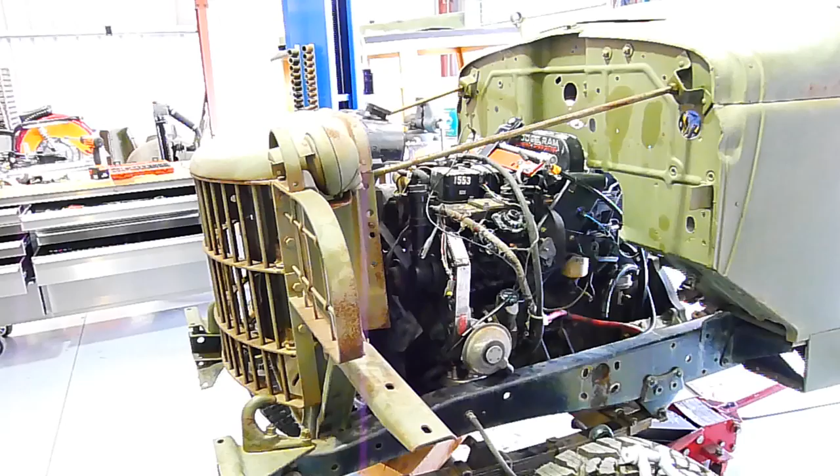So there it is, mocked up with the radiator and the front grille, everything in place. There's plenty of room, it appears, at least so far. And you can see there's even clearance for the Cummins fan in front of the radiator.

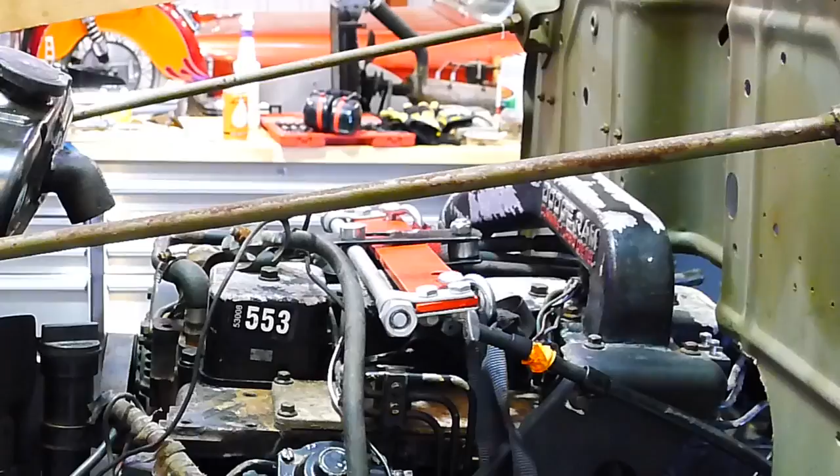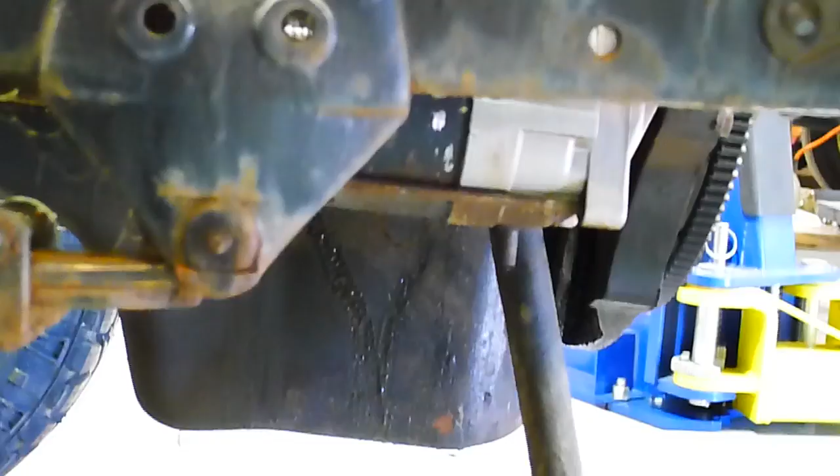I put a board up there to show where the top of the cowl is, and you can see there's plenty of room between the bottom of the hood and the top of the engine. And so there's plenty of room, so moving up 3 inches would be just fine, and it would also give me some needed clearance where the oil pan hangs down.

So if I go much further than 3 inches, then the fan starts to hit the top of the radiator. So it's going to go forward 3 inches and up 3 inches, and I've marked that on the actual frame.

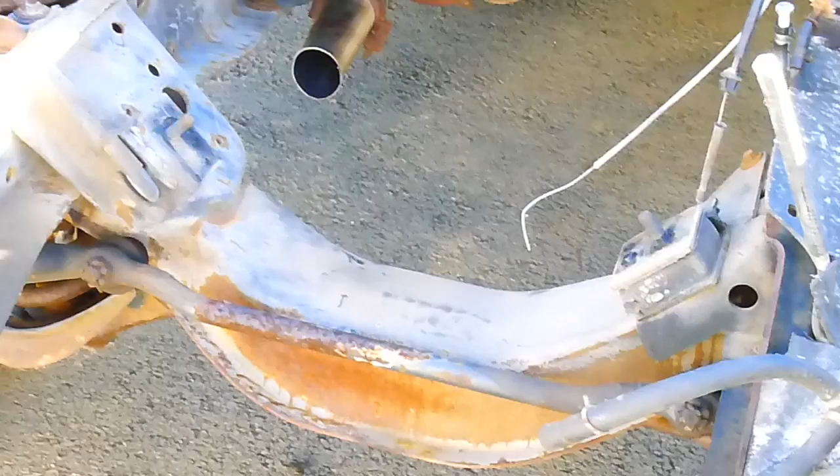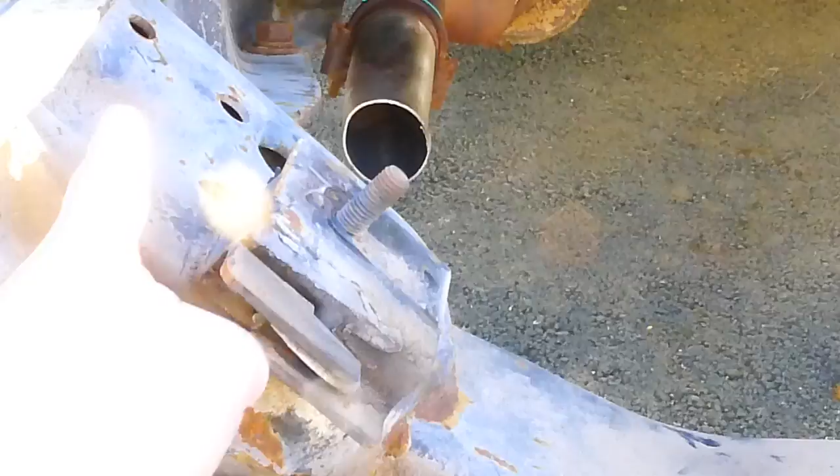So this is what the original crossmember looked like in the donor vehicle, and the important things here to me are going to be, one, this angle here, which is 45 degrees, and the distance between the two motor mounts. That's going to be critical. So I'm going to measure that up.

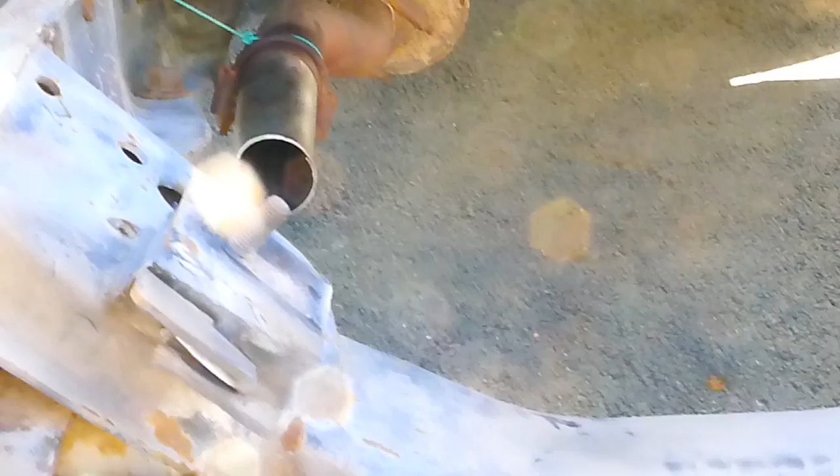I'm going to make a really rough control drawing, and then I'm going to transfer it to an accurate drawing, and I'm going to have that cross piece fabricated by a company called Paso Robles Welding, which can cut it out very accurately and weld it well. So that cross member is going to be an important piece.

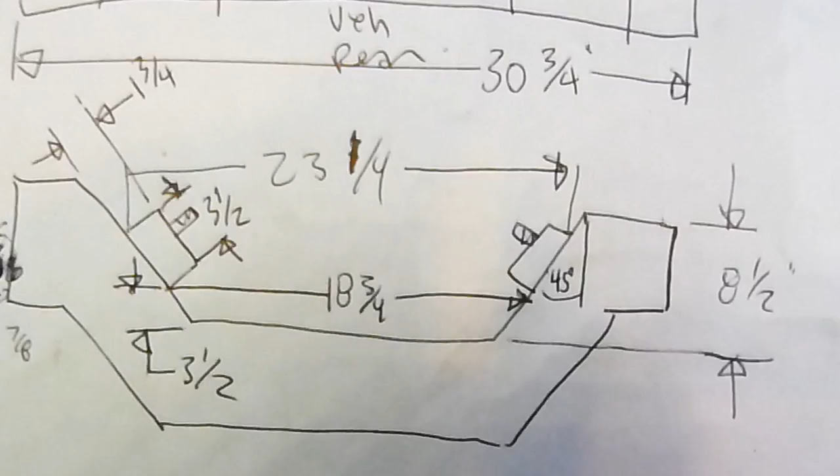So this is my hybrid drawing. Just rough dimensions, really not even accurate from a scale standpoint, but it's got all the measurements on it. You can see there's some asymmetry to the frame itself, and it's noted there, and it's all dimensioned.

And then I took it over, and this is an accurate scale drawing. I chose 1/4 inch equals 1 inch, and that's going to be the cross member. We're going to get that fabricated.

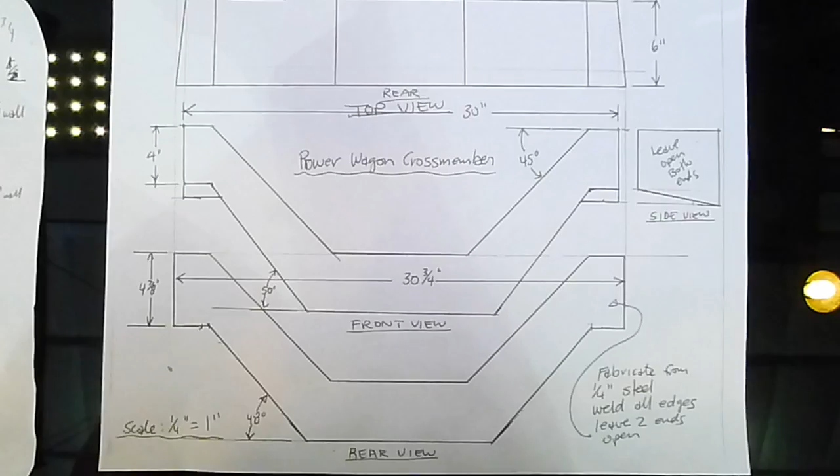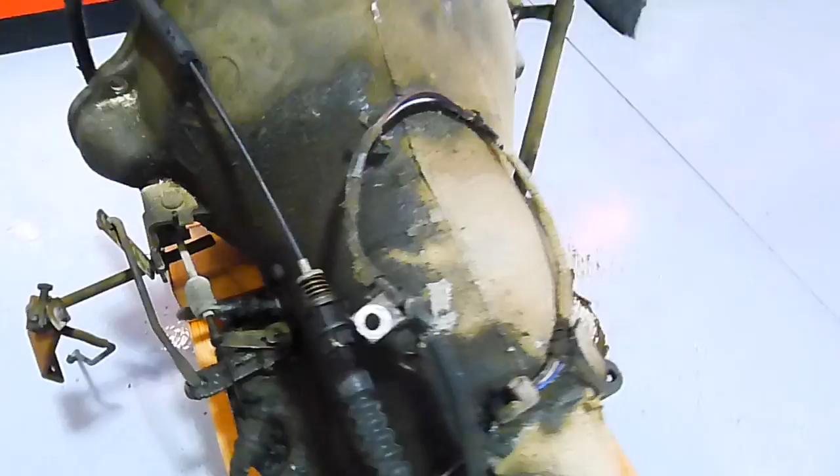The other thing I'm going to do is have this transmission rebuilt. It was working in the donor vehicle, but you can see there's some leaks. Some of it was oil that got on it when we were taking it out, and some of it's just older oil. And so it's a good idea to get that rebuilt, at least the seals replaced, and then we'll see what else needs to be done.

I'm not going to go haywire on it, because it was working, it probably won't need a lot, but we're going to take it into a transmission shop and have that rebuilt while we're getting the crossmember fabricated.

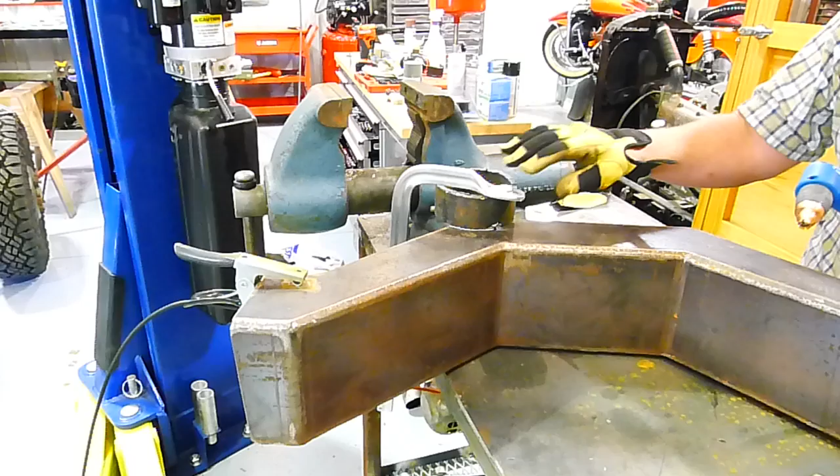So what I've done is I've clamped a piece of the pipe to the crossmember, and this is the same pipe that I'm going to use for the tunnel. Using it as a template, I'm going to plasma cut the tunnel into the crossmember.

So with both sides cut out on the round, I've got a little template laying on here, and I'm going to go ahead and cut the straights.

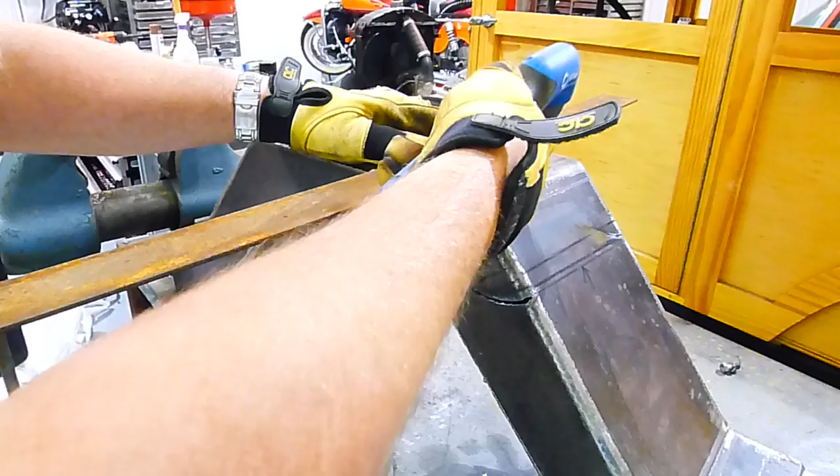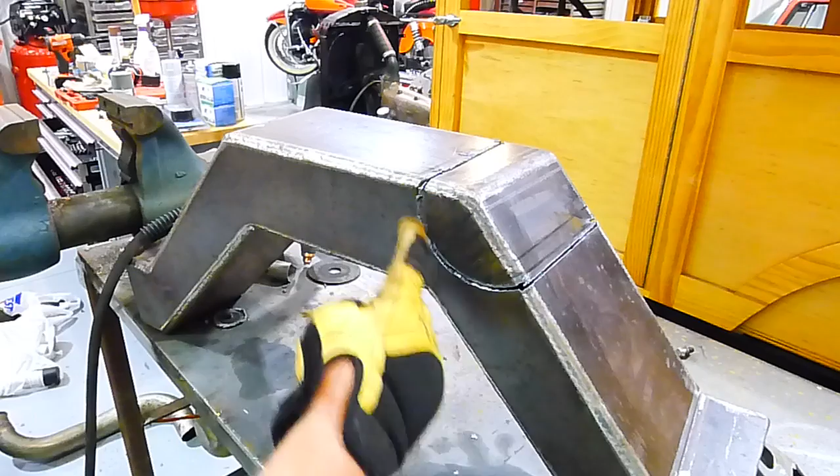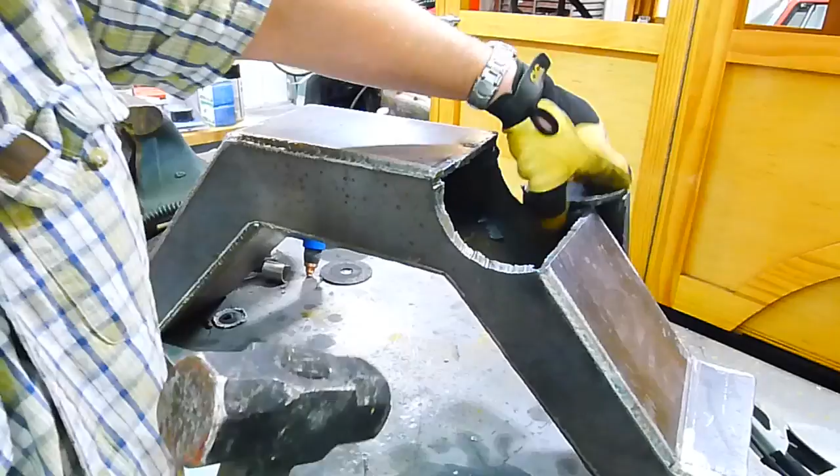So with the 2 straight cuts and the 2 round cuts cut, I should be able to just tap it off. There it comes. And there's my tunnel.

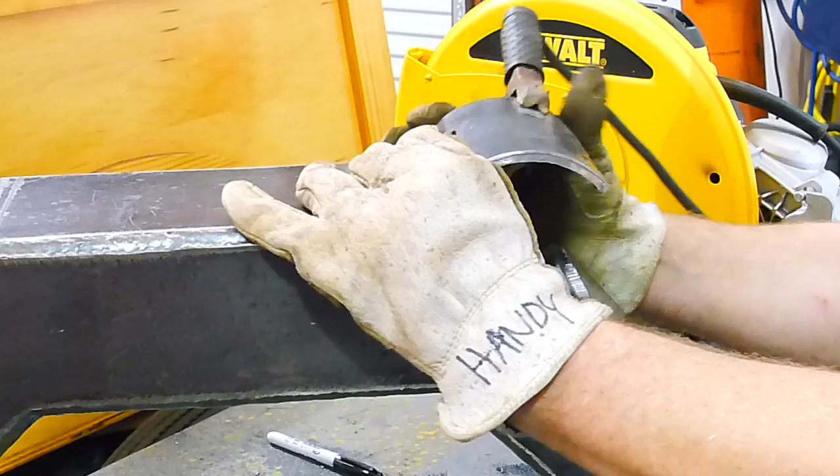So what I'm going to do right now is try to start this pipe at one end and get about halfway, then I'm going to flare it out this way. So it's not going to just be laid in straight, because it flares out. We're starting with the pipe because it makes it easier, but we're going to flare it out at both ends to make it clear the max amount.

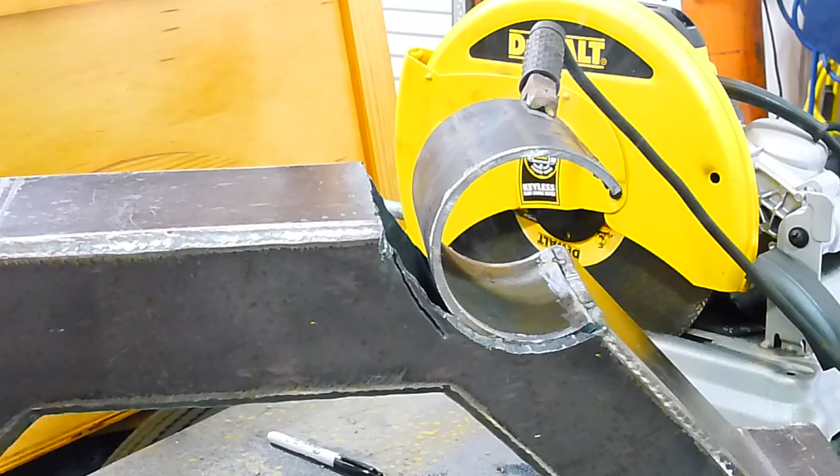So right now I'm going to just tack it in at the back. Take a look and see how that looks. If everything is good, I'm going to tack it in back here really good, and then I'm going to start bending it around to fit here.

Yeah, so I'm just welding it off as I go, and I'm slowly rolling it right here. So that's 1/4 inch steel. Gotta give it enough time to get a nice deep penetration.

Okay, I'm pretty happy with that. All that's really left is just wire brush it out a little bit.

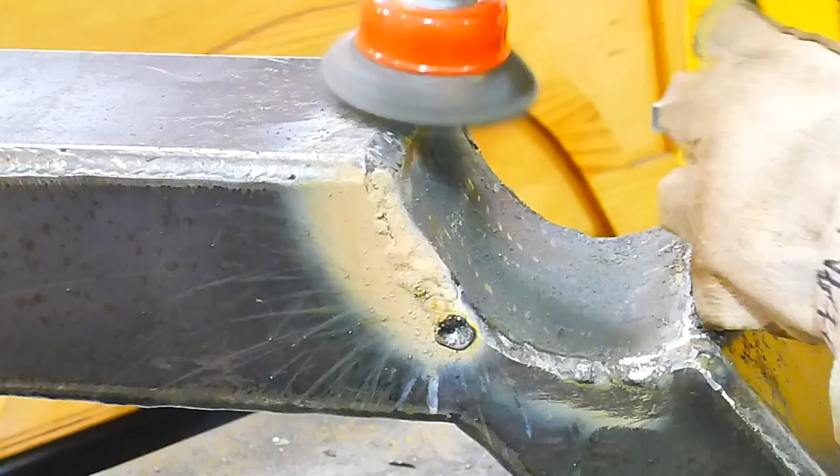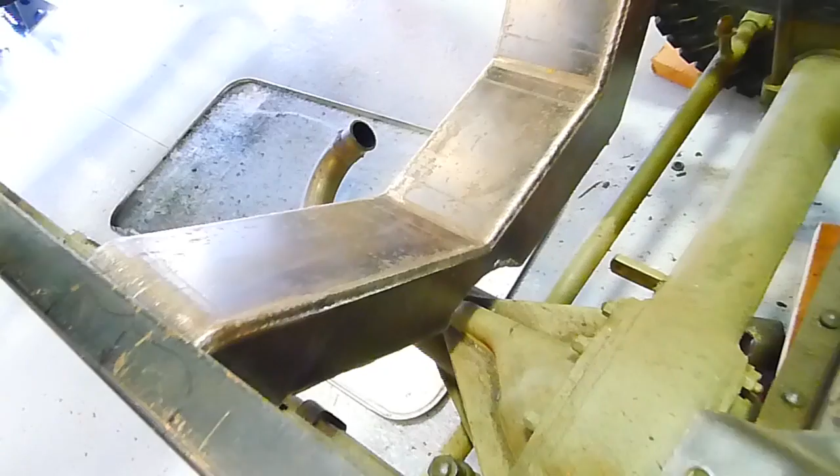So here you see the cross member in place. There's the clearance right there, and how it fits in the taper. I'm not going to completely bolt it in yet because I still have to put in the motor mounts and cut away some holes for access, etc.

So what I've done right now is I'm out at the donor vehicle, and I've made a bent strip of metal with the exact angles in place, and I've clamped them to the old cross member, and I've gone underneath and traced exactly where the bolts are.

On one side it's a bolt hole, and the other side it's a slot, so that the motor mount on the driver's side can go up and down and adjust so you can get the motor in place. This is the best way I found to try to get the exact same angles and dimensions of the patterns for mounting the motor mounts.

So I've drilled a slot in here and a hole here as accurately as I possibly could, measured this to get it centered on the new cross member, and now I'm just simply going to trace this slot and this hole. I'm going to cut that into the cross member. I'm also going to drill a hole all the way through the cross member in both sides, so that I can also cut a hole in the bottom side for getting a wrench through and tightening up the motor mounts. And that should be it.

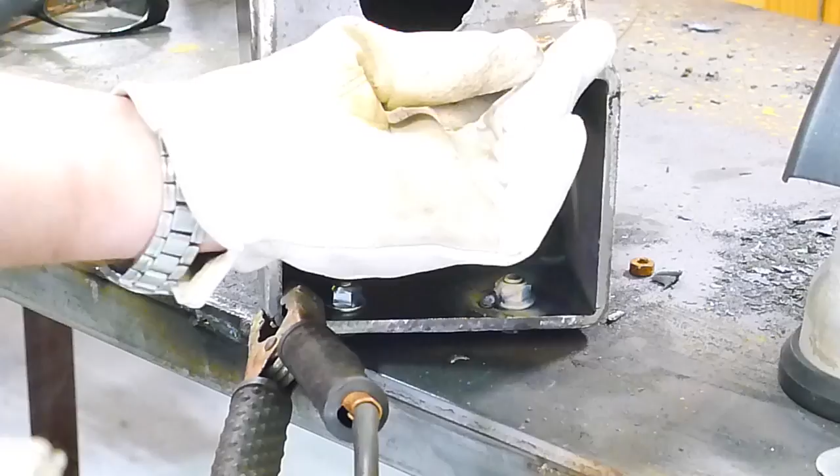So I'm ready to weld. I've tightened these bolts up right here, and I have these flange nuts inside. So what I'm just going to do is go ahead and weld those off.

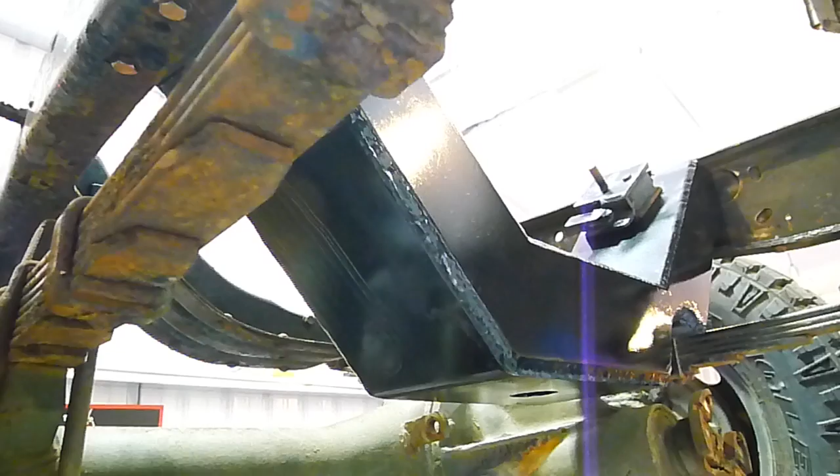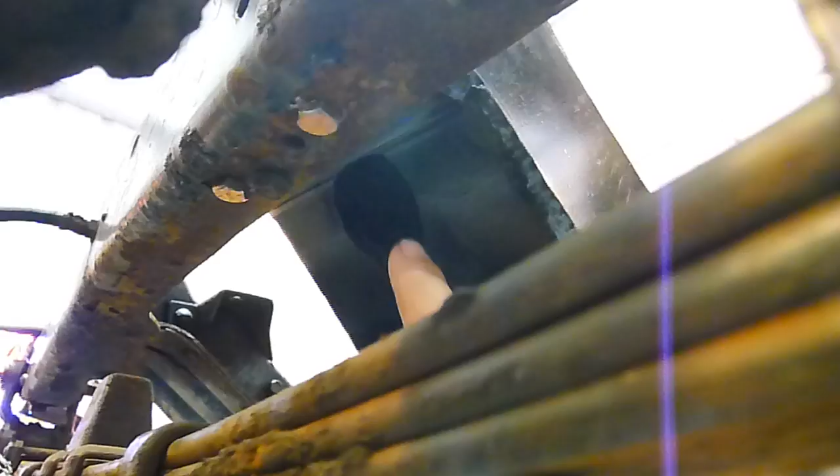So I have the Power Wagon up on the hoist. You can see I've bolted it from top side and underside, and then this is the access hole to get to the motor mounts. And that's kind of how it all fits in there. You can see the 2 motor mounts are installed. There's a tunnel here for the differential to come through, and that's how it all fits. And there's plenty of beef to this being 1/4 inch thick, so should work out pretty well.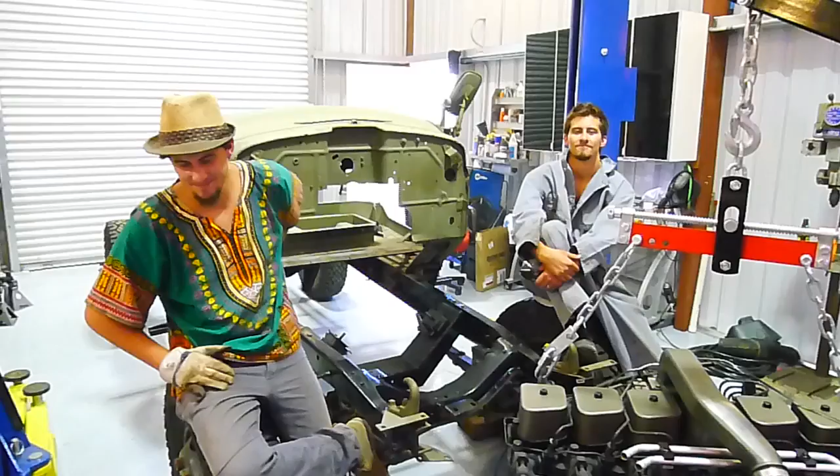So this is actually the big day that we put the motor in the Power Wagon, and it happens to be Father's Day, which is especially poignant for me because these are my 2 sons. On the right you have Michael, and on the left you have Lucas. And when they turned 14, we started working on these hot rods over here. 1957 Studebaker Parkview Commander. That's a Woody, drift Woody. And this one over here, which is a 1930 Ford Model A Woody box. And those are Mike and Luke's projects. We're still kind of working on them. But they're here today, because it's Father's Day, to help me put this engine finally in the Power Wagon.

So it's not a huge project because it's all set up to go, but it's actually a great moment in any hot rod build where the engine gets transplanted into the vehicle and ends up staying there. So I'm happy to have Mike and Luke here on Father's Day to help me do this. Happy Father's Day, Dad.

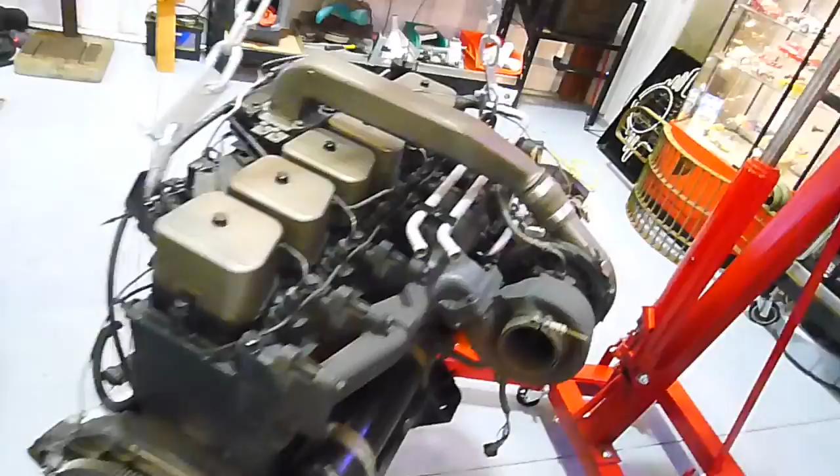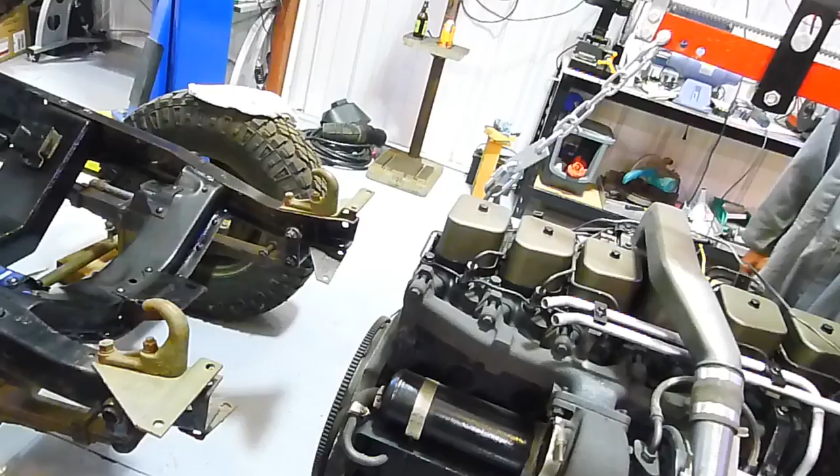All right. Now the first thing you see is we've actually cut this cowl out quite a bit more than what we originally planned on doing, just because we want to make sure we have plenty of clearance for the engine. There's the cross member in place with the motor mounts, all bolted in with grade 8 bolts. And this is the engine, all kind of detailed out a little bit, ready to go in. And there's Luke getting it straightened out, and we're going to get ready to lift it up and stick it on the motor mounts. One motor mount's fast, the other one's got a slot so it can move and take a little jimmying around, but it should go in pretty easy.

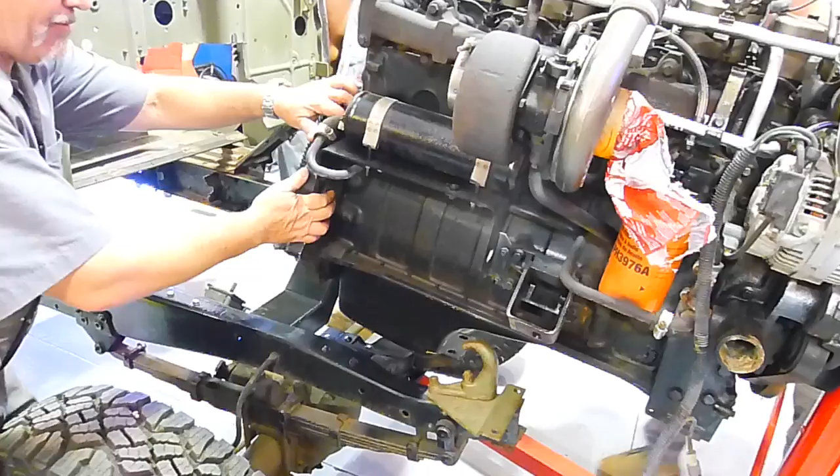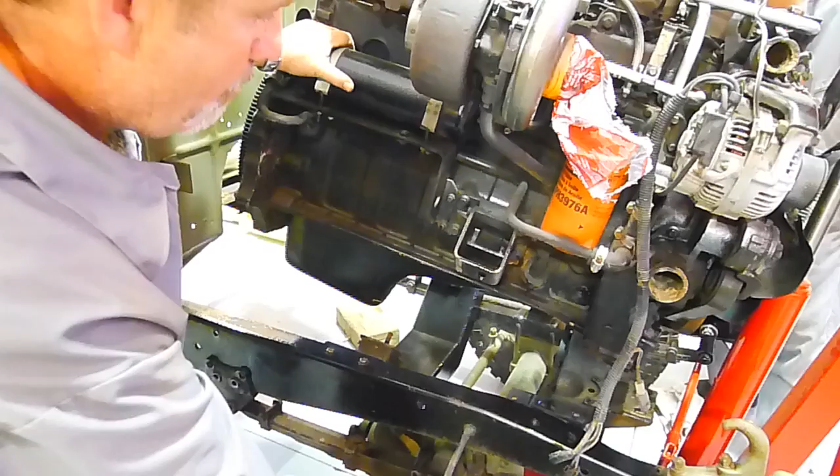Okay, here it goes, guys. We'll go ahead and push it in. Go ahead and push it in. It's okay, we can lift it up a bit, jack it up. Okay, push it. There we go. Nice, nice. Okay, now lower it down. Lower it down a little bit here. You know how to lower it, not too fast. Easy. Okay. Whoa, whoa, that's good. Is that good? For now. Okay.

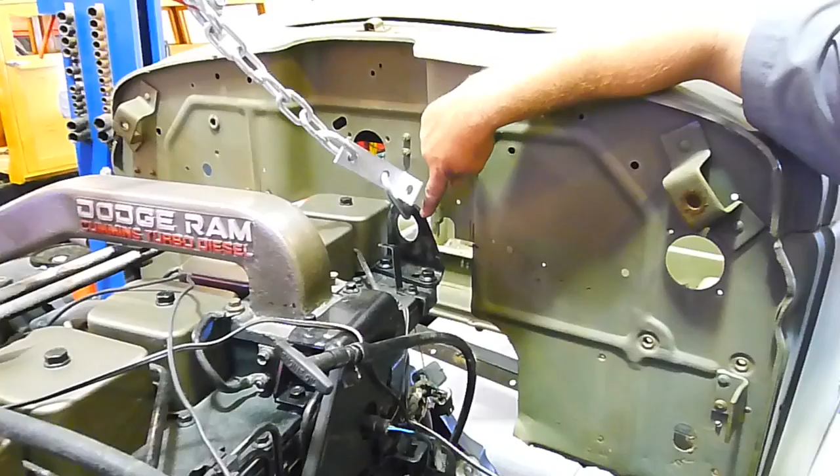So our problem right now is right here, this bracket is hitting on here. That's only a motor hoist bracket, so I'm going to take it off altogether, and I've attached a strap over here, and we're going to lift it from the front part and see how that works, because I don't want to have to cut the cowl more than I need to just to get it in. So we'll take this off.

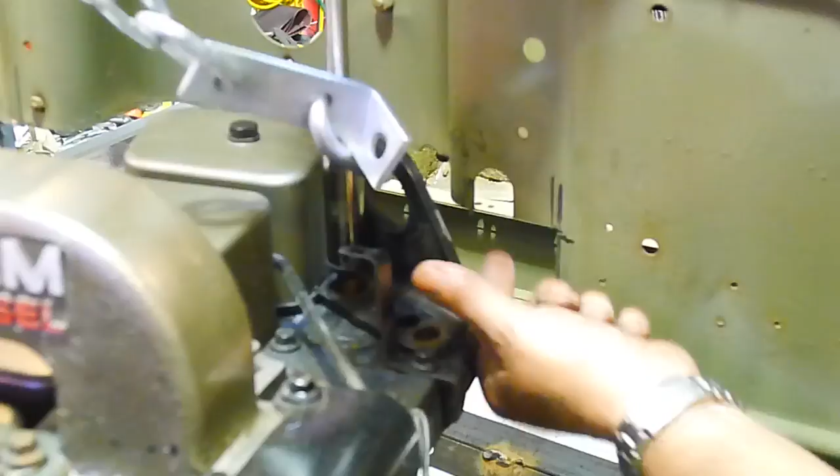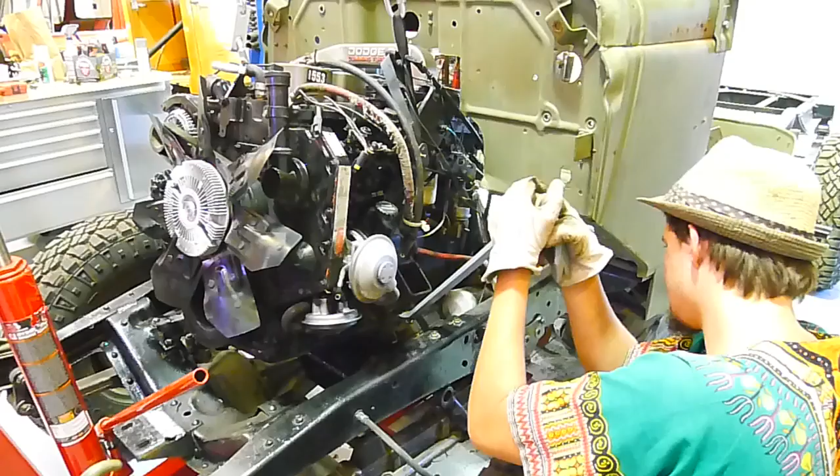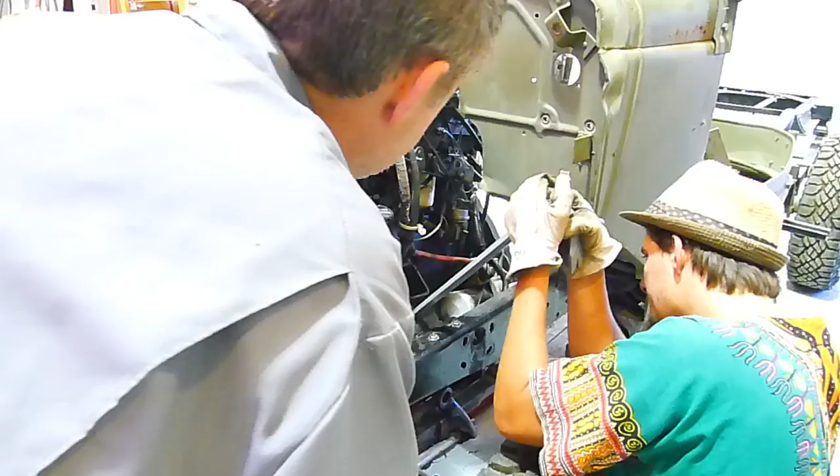Like that. And we'll attach it over here. All right. Okay, final moments. We're just getting that last bolt in. What do you want me to do? Jack it up a little bit, Mike? Lower it a little bit. Lower? Okay. Here we go. Easy. Luke's underneath on the jack. See that? It's almost in there. Yeah, it's just trying to get that last hole in there.

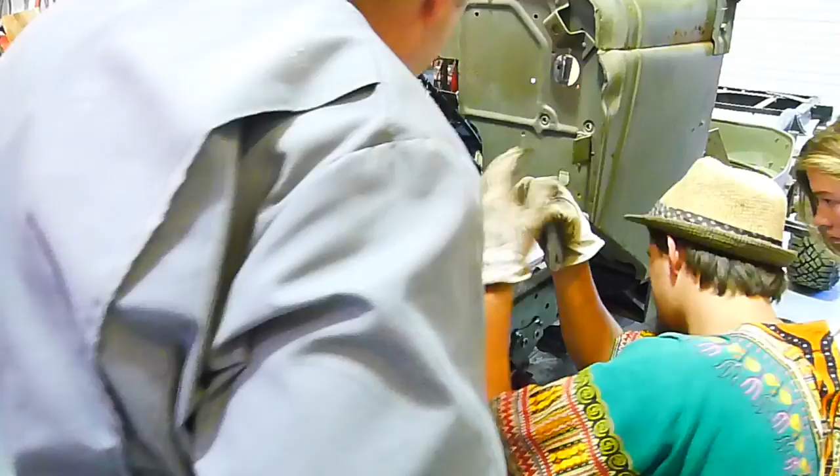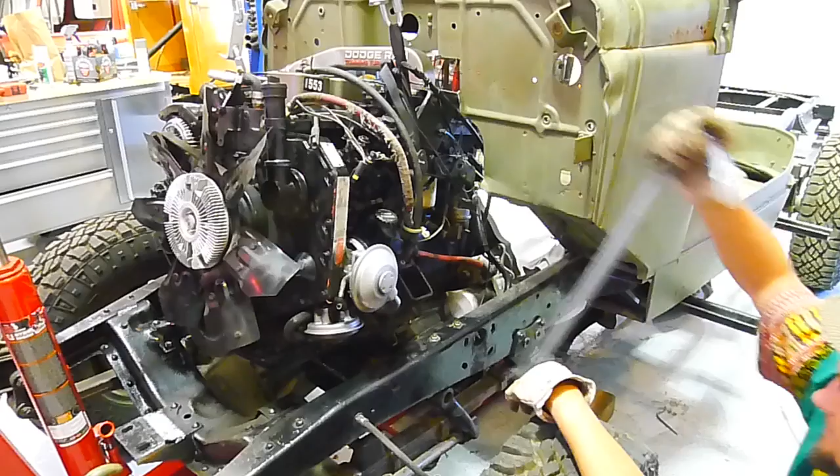This one's on a slider, so. Okay, my wheels came off again. Okay, let me get a little tap. Yeah, all it needs is a tap. Just a little tap, right? Oh, bam! It's in.

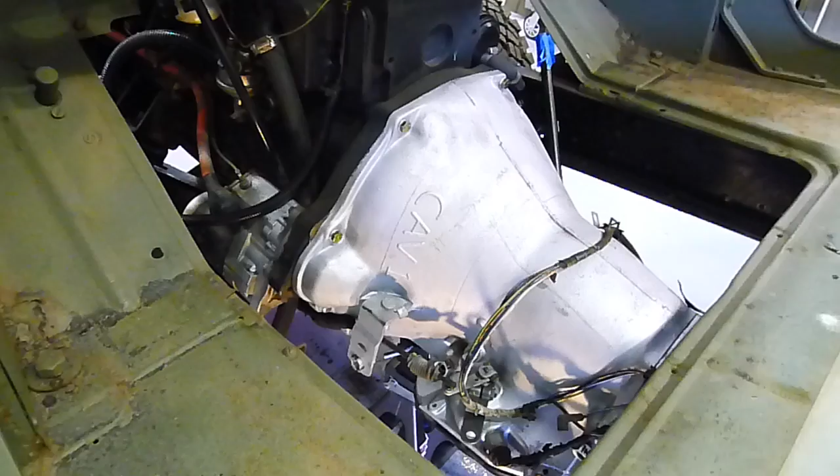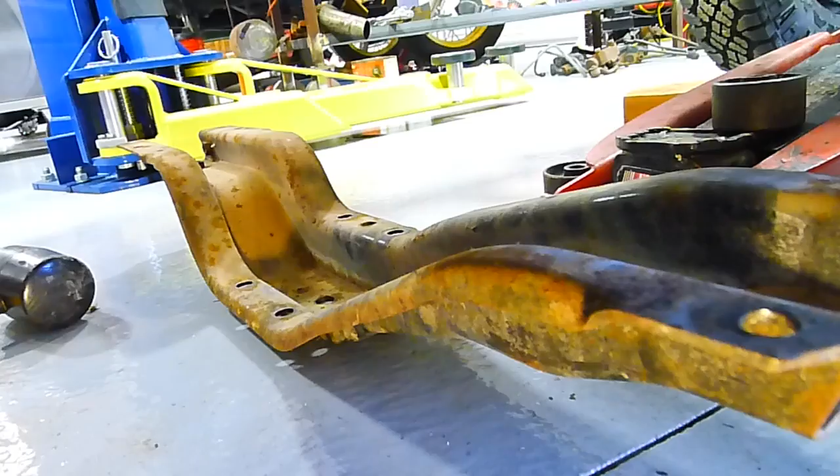All right, so I've bolted on the transmission and got that locked in place. Underneath the car, you can see, those are the old transfer case brackets, and this is the rear transmission bracket from the donor vehicle. And that bolts right up to the transmission here, and it looks like if I bolt it to the underside of the frame, it'll span here pretty well. So that's my next step.

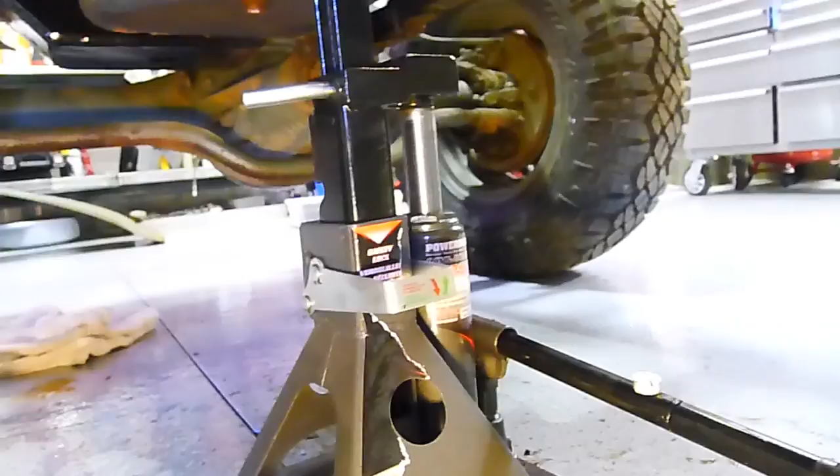So we'll just take these transfer case brackets off, and I'll put the rear transmission bracket in place and see how it fits. How I adjust the angle of the engine is with this jack that has a jack stand and a jack built into one, so I can lock it into position with this lever. It's kind of a handy thing to have. I've got the inspection plate removed off the bottom of the transmission, so I can just jack up the rear oil pan and get any angle I want, and I'm going to find the optimal angle by doing it that way.

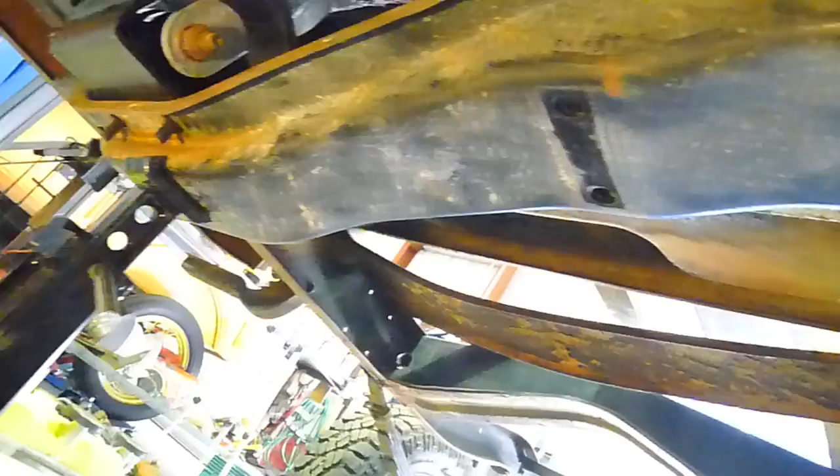And then I've done the same thing at the tail end of the transmission. You can see there's the transmission mount, a second jack that's holding this back up. I don't have the bolts into the mounts yet, but I simply jacked up the whole thing, the cross member and the mount and the tail of the transmission, and I'm going to line it up and probably drill some new holes here and bolt it to the underside of my frame rails.

And the position is pretty good. There's the clearance right there, which gives enough clearance to clear the frame for the drive shaft. And there's the mount, and everything looks like it's going to slide right in place, hopefully.

So coming back up on the top side here, before I put any final bolts in or drill anything through the frame, I want to put my shifter in place. So I've got a shifter that I bought from American Shifter Corporation. I'm going to install that on top of the transmission.

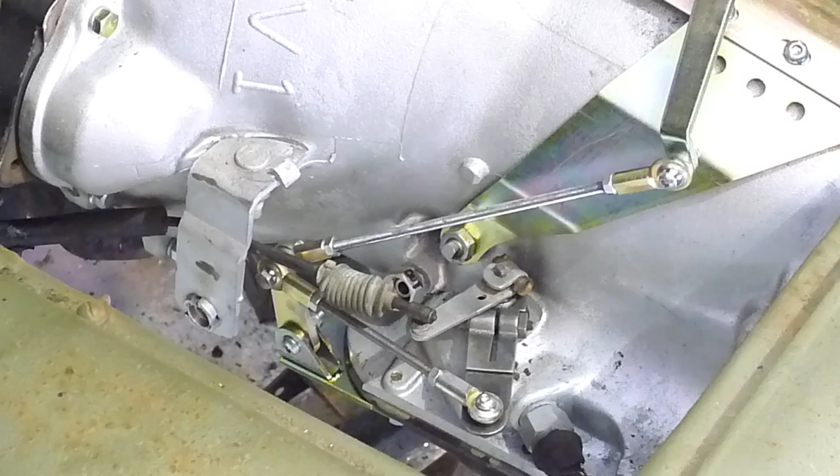Alright, the shift kit is installed, and it's a good thing we did it before we actually bolted up the transmission, so there's room to put it. You could see the linkage, the way it reverses for shifting. Pretty decent kit. I think the only problem I had with it was the pretty weak instructions, but other than that, it's a really good product from American Shifter, made for the 727 transmission.

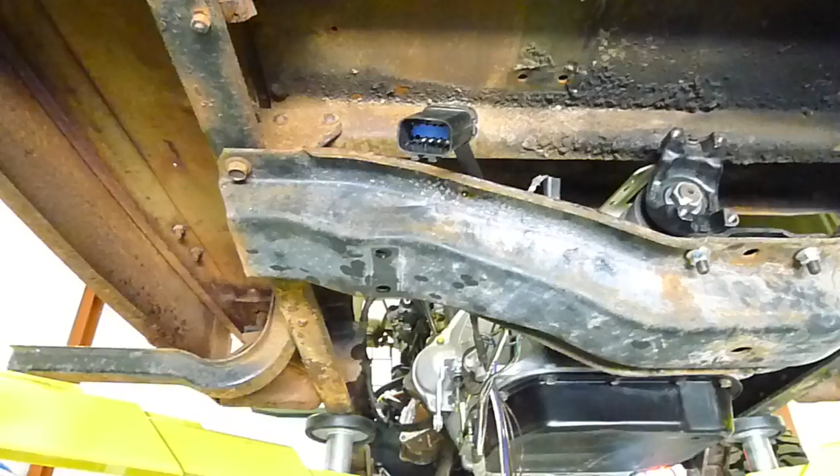Here's a good look at the installed crossmember. It bolted right to the frame. I had to drill a few holes and put it right in there, and it worked out real well. There's the clearance for the drive shaft, which is plenty. Motor sits at a good angle, just slightly down at the back.

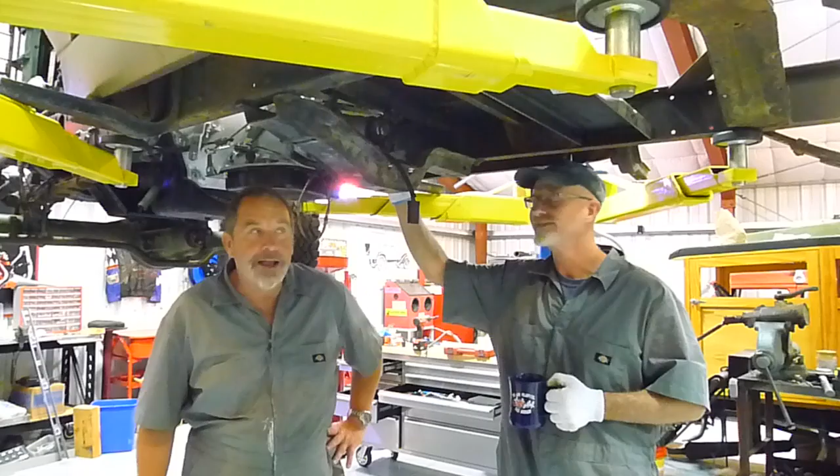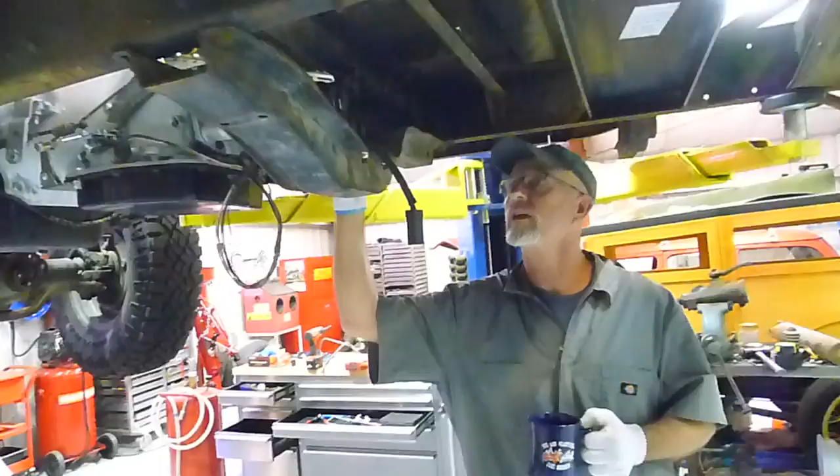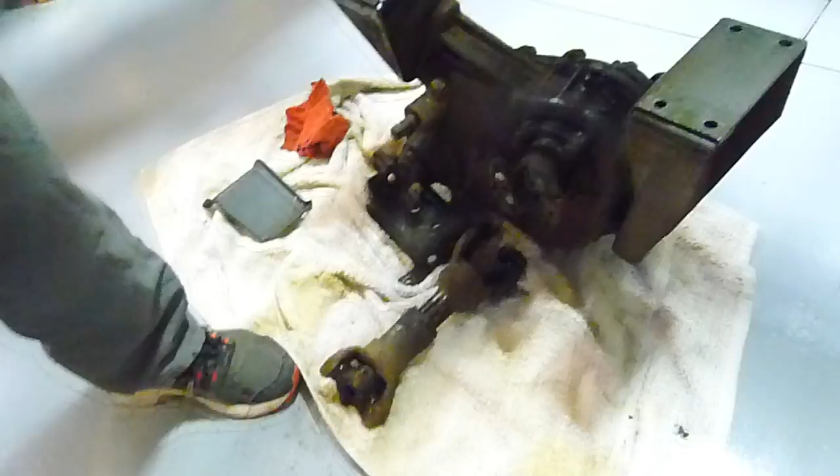Alright, I got my brother-in-law Al back to help sort things out, get this thing back on track. And today we're actually going to try to put the transfer case in the right position. So that's our project for the day. Okay, so one of the things that's kind of nice about this particular job is that we've got the style of transfer case that's not bolted to the back of the transmission. So that gives us some creative license here to actually locate the transfer case where we want to.

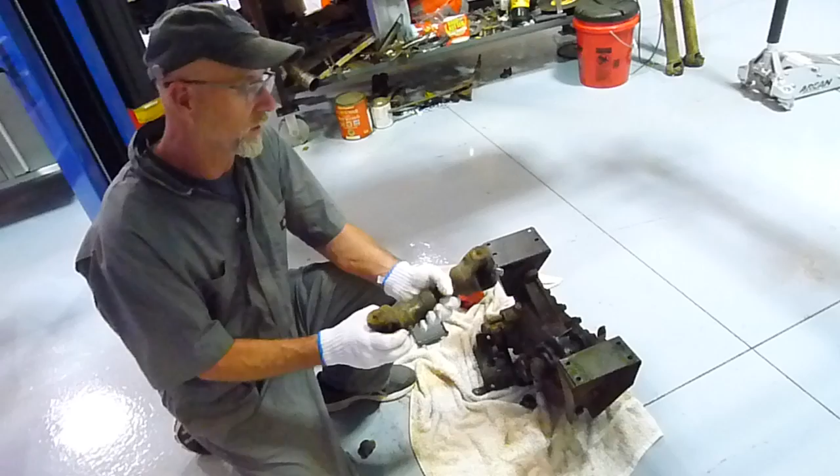So one of the things that we're going to use as a reference point is the old drive shaft, and try to replicate from this wagon originally what the distance was for this small shaft that went between the transmission and the transfer case. So we've got a newer Cummins engine with the transmission that came in that particular truck. So we're going to adapt this length of shaft between the transmission and the transfer case. And obviously we're going to have to change out one of the splines so it meets up with the transmission properly. But we're using that as a reference point.

And then you can see that John had a nicely built cross member here to support the transfer case. So what we're trying to do now is just get the correct length. And we've made some reference marks on the frame itself. And we're just going to trim this piece, and then we should be able to bolt things up together.

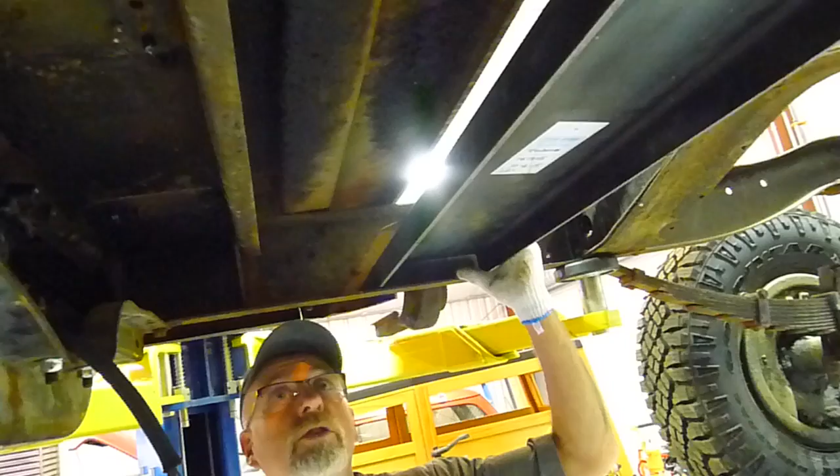So, Al, on this process right now, what are the most critical things we have to think about? So, you know, if you get on the net, you'll get lots of information on driveline inclination. So that's one of the things that we're trying to replicate here. You can see that this differential has a particular angle to it, and that angle is critical, and it should parallel the angle that comes out of the transmission and the transfer case.

So, I'm not going to get into the challenges of understanding driveline inclination here, but for our purposes, if we've got, for argument's sake, a 5-degree tilt upward on the differential, that should match with an equal tilt on the transmission. Actually, in our case, it's with the transfer case. If you don't do that, you're going to end up with a driveline vibration.

And one interesting thing on the transfer case is, it might be hard to see on the video, but it already has a tilt built into it that would have been based on this angle right here. So we can have some slight adjustment in the transmission angle, but it looks very close. And if we had to, we could add washers right here to lower that in the back. I don't know what we'd do if we had to raise it, but that's the critical thing, is to try to get these angles right.

We do that, I think we have a vehicle that could go down the highway, or at least has the potential to do that. Yep. Okay, that's the plan.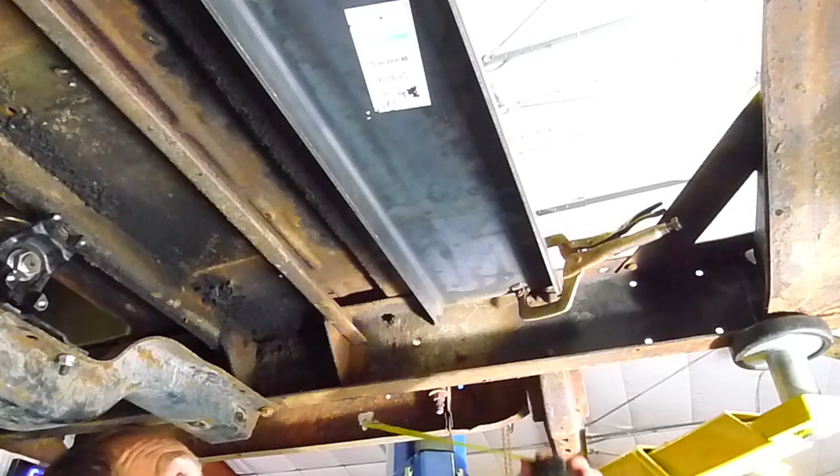So we have the new cross member in place. This is measured exactly 5 1/8 inches from both sides of the old cross member, so I'm assuming that's pretty straight. Going to put a center punch here, here, and there's another one that's going to go right here. I'm going to put 3 bolts in. That's what the old one had, 3 rivets. And we'll drill that out, and then we'll bring it out and clamp it to the transfer case, and we'll put it up as a unit.

So what we had to do here is we're going to use the pneumatic drill. We had to cut a drill bit in half, and we're going to go drill it like this, just so we can get in between the frame rails.

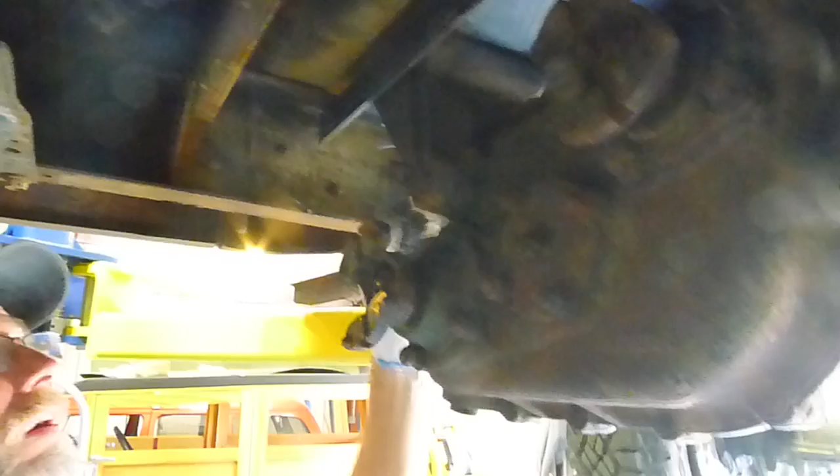Okay, thanks for watching in on what we're up to here. So this is the continuation of the Cummins engine installation into this old Army unit. So we've got the transfer case mounted now. You can see that John did a great job of having this cross member built here. It's a nice C-shaped channel. It's equally, if not stronger, than what was in there originally.

So we've spent a fair bit of today getting the holes drilled into the frame. You can see that we got 3 holes. There's just 2 bolts in right now, but there's 3 holes aligning the cross member with the frame of the truck, and then there's an additional 4 bolts that hold the transfer case onto this plate.

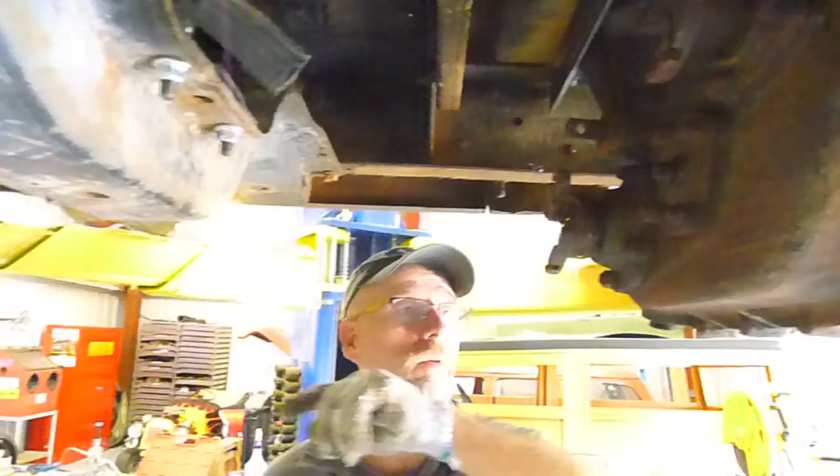And we're pretty confident that we've got our drive shaft angles in the right spot, and we had to do a fair bit of measurement here to make sure that our front drive shaft was about the correct length in here. So that's what we're going to have for the intermediate shaft, you could call it, between the transmission and the transfer case. And then we've got our front drive shaft obviously coming forward from there, and the back drive shaft here. The back drive shaft is a fair bit shorter than it was factory, but not a whole lot. But we're pretty confident this is going to work out okay.

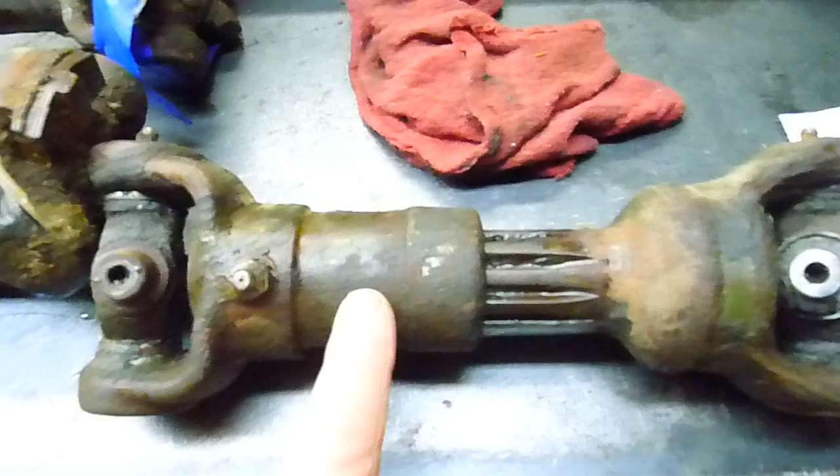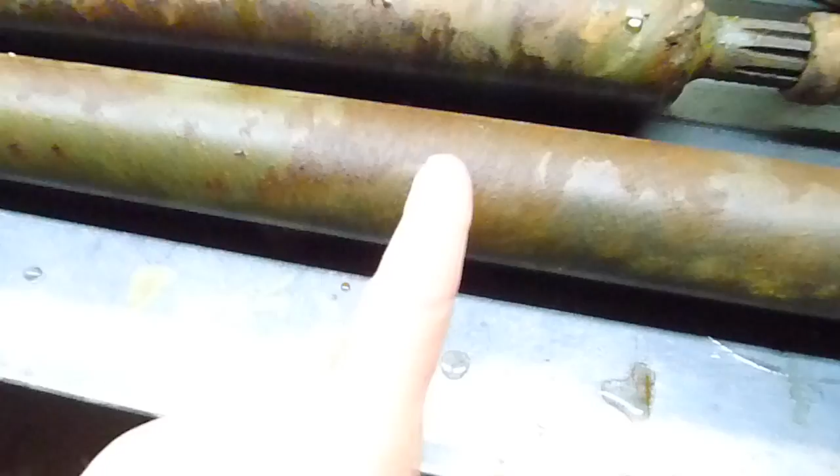All right, we're here at Roslyn's Performance Motorsports. We're going to go inside and see if they can fix our drive shafts for us. Okay, so these are the drive shafts all lined up. What we're going to end up doing is buying a new spline piece for this and using the existing transfer case to transmission style. And then he's going to make a new tube using the same diameter for the front, and he's going to put a fat tube on the back.

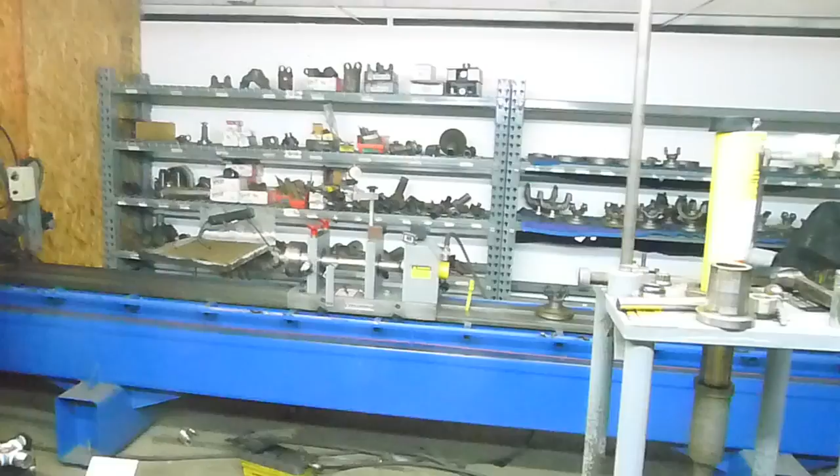And here Al is over here at the lathe. Look at the big long lathe for making drive shafts. And I guess that's how he does it. And Danny, there's a yoke in here that centers the shaft. Oh yeah, there's this end and then there's a yoke already chucked up. Let's come on for a closer view.

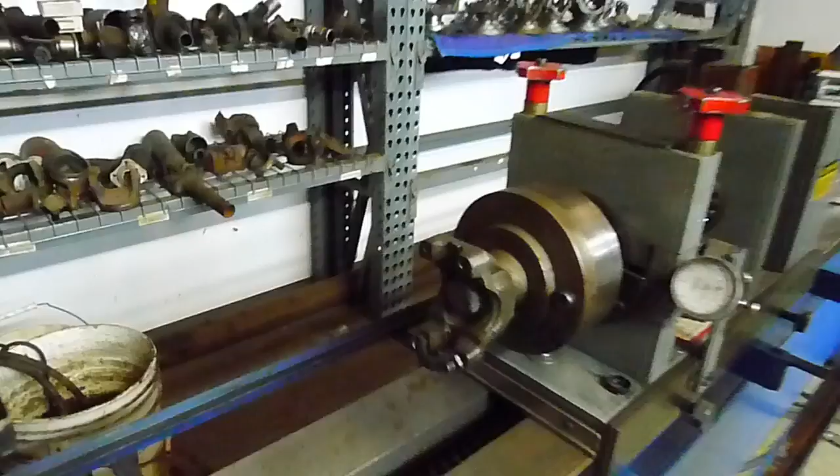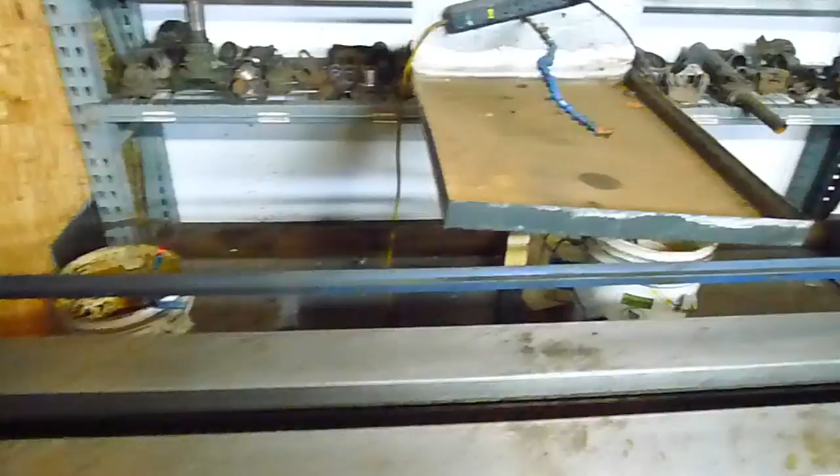Yeah, so he chucks up a yoke on one side and, I guess he actually puts the U-joint in it then. That's right. That's why he needs a U-joint to make the shaft. I gotcha. So he's got, what has he got, a 6-jaw chuck on there. That's how it's done. Yeah, it's good. Got all of his parts.